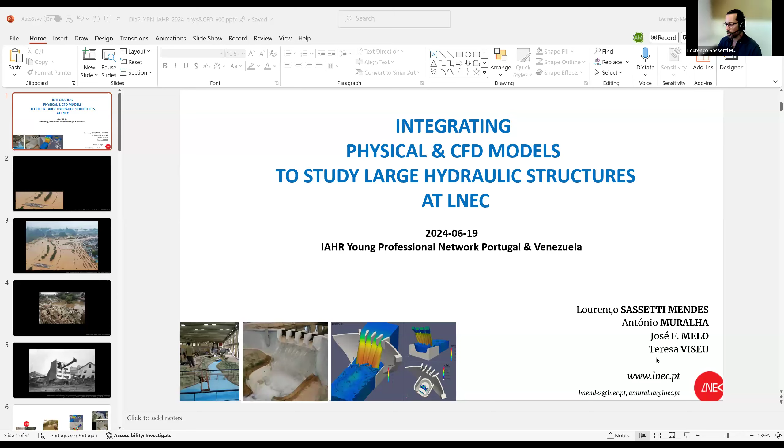So I will start my presentation, as I need to share my screen first. Please just wait a minute. Now, can you see the screen with the PowerPoint presentation? No? Sorry, I had to change, because the one that I want to share is this one. I just hope this bar goes away. I don't know exactly how to do it. Maybe we'll deal with it.

This presentation is titled Integrating Physical and CFD Models to Study Large Hydraulic Structures. It describes the work we have been developing at LNEC, the National Civil Engineering Laboratory of Portugal, located in Lisbon. This work was mainly developed by myself, Lourenço, and Antonio, who is also in this session today, along with Engenheiro Melo and Engenheira Teresa Viseu.

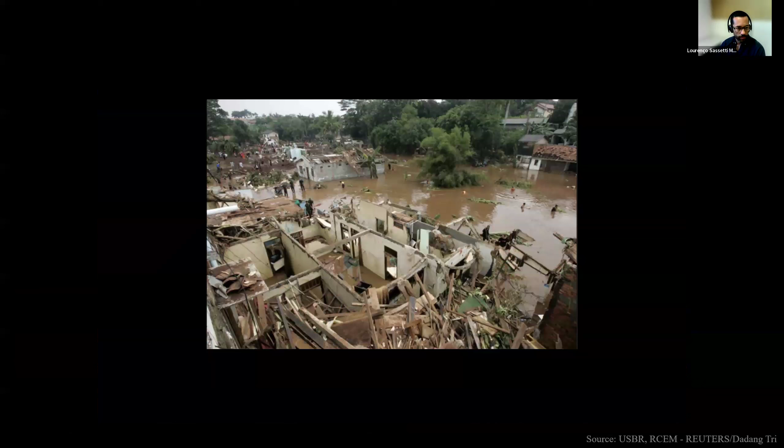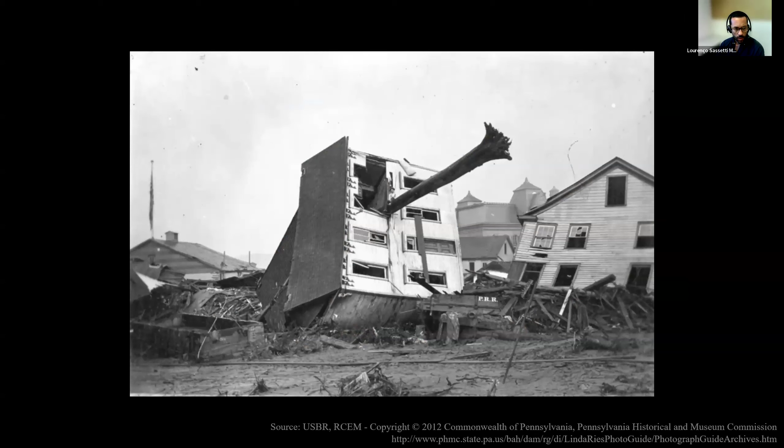So what do we do? At LNEC, our team is called NRE, the Hydraulic Resources and Hydraulic Structures team. Yesterday, Antonio and Silvia also presented our activity, so I'm not going to extend on that much. We have 70 years of experience doing research and consultancy, validating and optimizing large hydraulic structures, mainly spillways, but lots more hydraulic structures, also some urban drainage and other large hydraulic structures.

So in the last 70 years, we have been developing mostly our activity using physical modeling to study these large hydraulic structures. I have to mention that we also do some flood analysis and all other kinds of hydraulic research and hydraulic structure related issues.

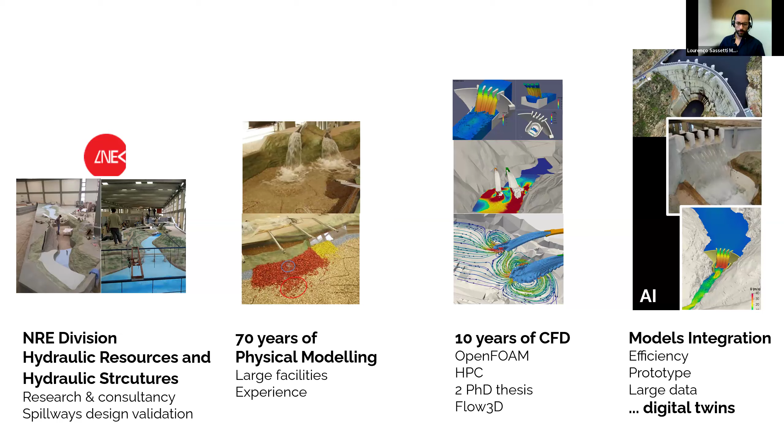In the last 10 years, more or less, we started using CFD, computational fluid dynamics, to help us study our problems, integrating it with the physical modeling. In the future, we hope to integrate it even better with more efficiency, connecting our models, both physical and numerical, to the prototypes, to have more data, to be more accurate, and to have a faster response to the challenges we get from companies, mostly engineering designers who need help to validate and optimize their solutions, but also large research activity, as you will see.

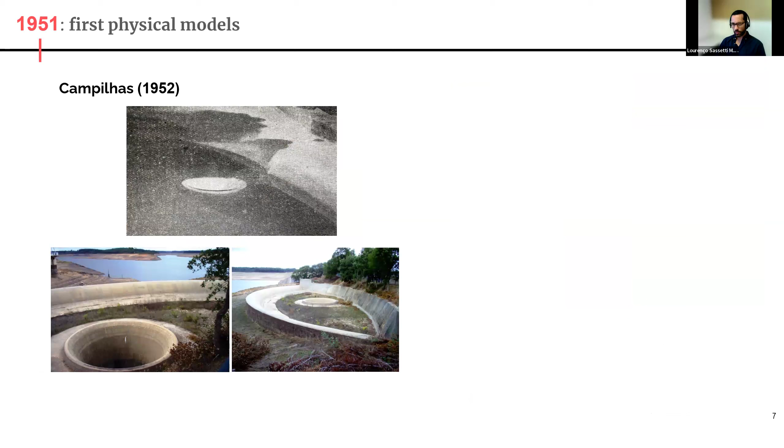In 1951, we started with our physical models. The first one was the dam of Campilhas in Portugal. Our first international model was for Brazil, and that study started in 1952.

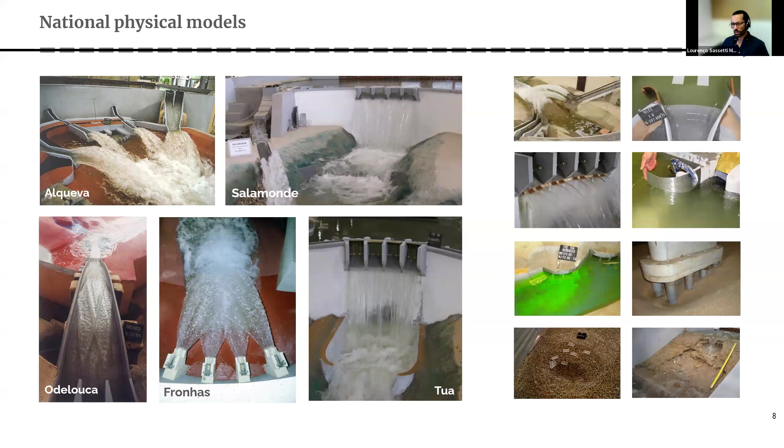We have lots of national physical models. You can see here some examples, mostly spillways, as I said before. We analyzed different elements - here you can see jets, an intake, the shapes of the guidance walls. Here, a traditional way of analyzing it is to change it with a flexible sheet of metal. Also some improvements on this spillway over the concrete dam, where we changed these shapes.

We also study velocities, turbulence and vorticity. This is an outtake of a hydroelectric power plant. We also study erosion in rivers - this is a bridge pile, but erosion can also be caused by jet impingement, and also erosion in earth-filled dams.

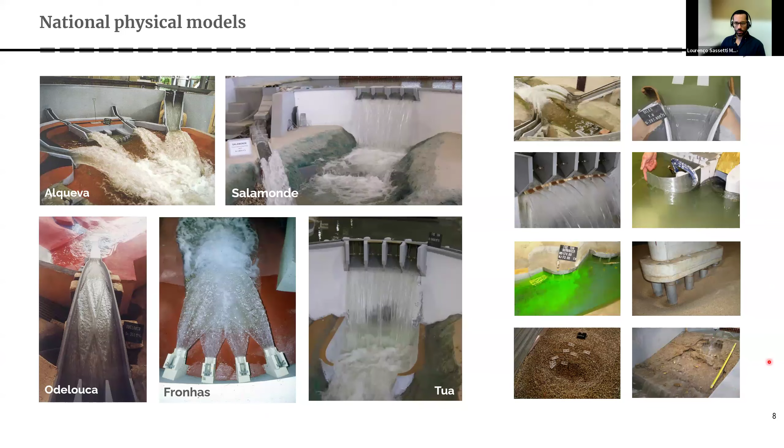We also have lots of international studies developed over the last 70 years. Overall, we've studied more than 150 dams, and most of our studies are regarding dams and spillways - 70% national and 30% international studies.

In your left bottom corner, you can see a typical size of a physical model that we have. It's more or less between 10 to 20 meters long by 5 to 10 meters wide.

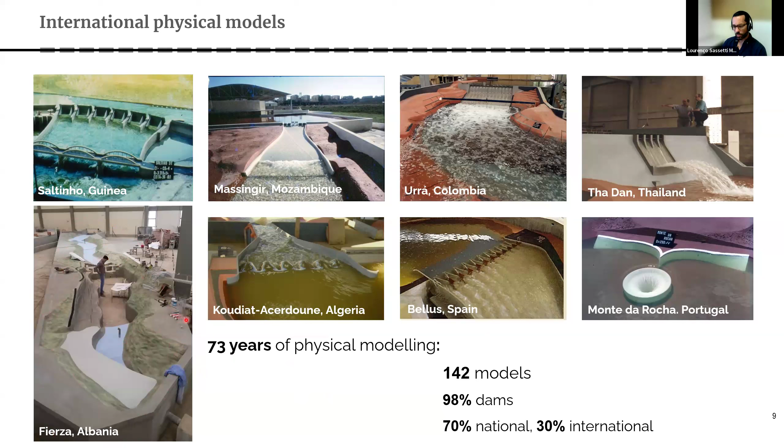We also have some permanent facilities to do research, as you can see, and this was further developed yesterday, so I won't talk about this today, but you can contact us if you're curious about what we've been doing.

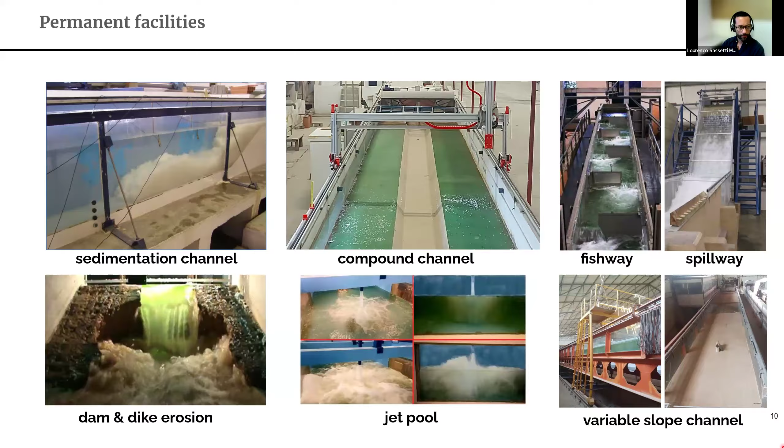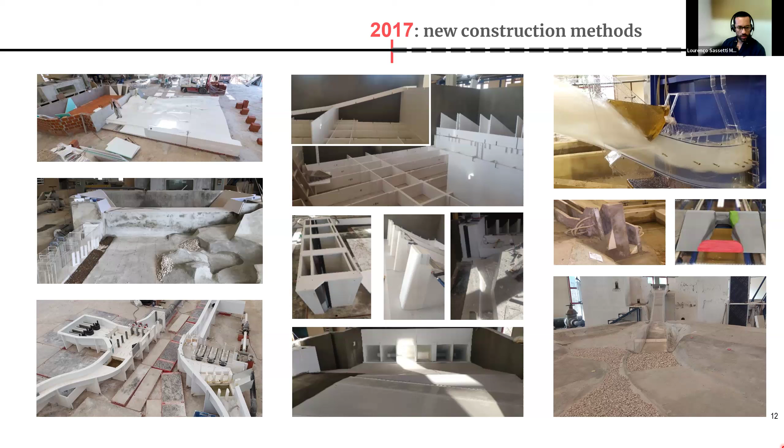Yesterday we also explained that our construction techniques for the physical models are evolving, and we are now using automated processes and new materials, more ecological but also faster to build. This was also developed and presented by Antonio yesterday, so you can talk with us if you're curious about this subject, in case you didn't have the opportunity to see it yesterday.

Now, just to introduce a bit of engineering in this presentation, I will use the example of spillway chutes so you can see how important these studies are. Spillway chutes are a safety structure of dams - they prevent overtopping, which is water passing over the dam, which typically, almost always, will lead to rupture of the dam. So what we do is design validation to prevent those accidents and the consequences I showed you at the beginning of the presentation.

Typically the flow is very complex, with very high velocities and complex phenomena like cavitation, and abrasion or damage of the structure, which is typically concrete. The flow has very high turbulence - it's very complex with roll waves, cross waves, and other non-linear phenomena. One of the most challenging aspects is air entrainment: when velocities are high, the flow starts to mix with air, so we're not just studying water flow, we're studying a mixture, and the phenomena involved are very complex.

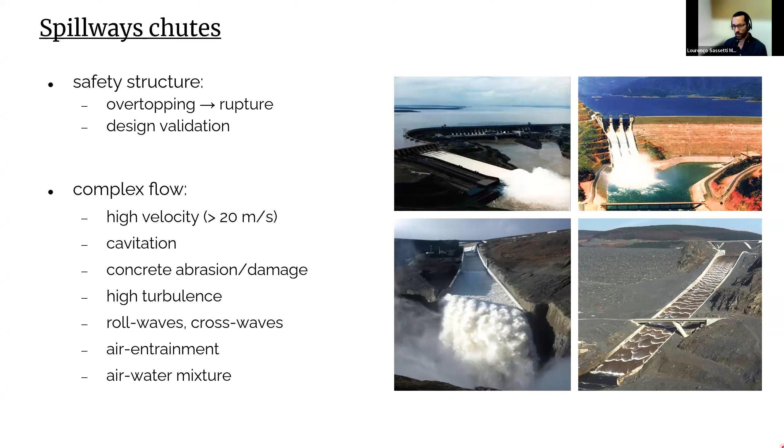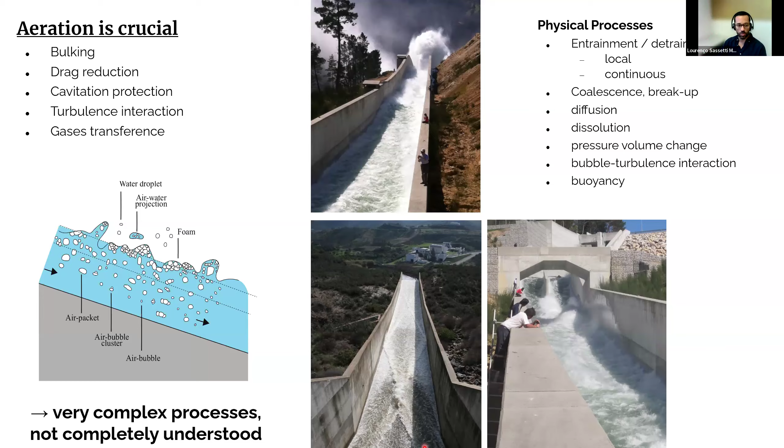But sometimes it also helps, because the presence of air, for instance, reduces cavitation damage, or might reduce it. As an example, you can see in this spillway there are two towers where air enters at the bottom - it's like a step where the air is sucked in, and the air enters the flow to prevent cavitation.

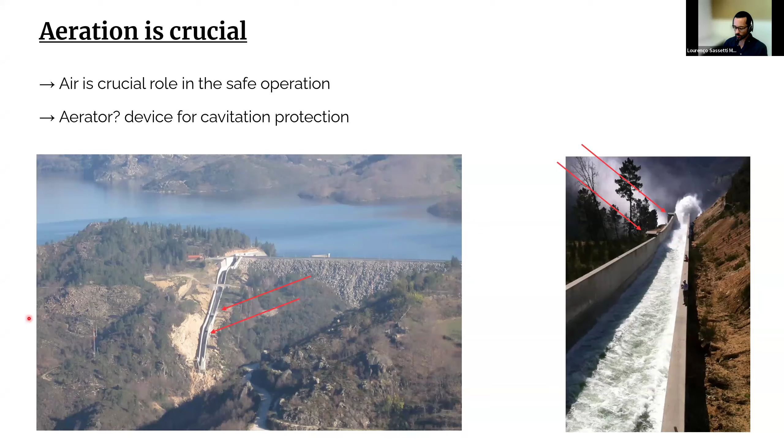So in 2010 at LNEC, we started to think about using numerical modeling to help us in our studies. We called this integrated modeling, where we use both the physical and the numerical to study the problems more accurately.

In a more global way, we can see physical modeling as reliable because it's not calculations, it's not models, it's pure water running in a scaled geometry of the dam. We already have lots of experience regarding the scale effects that this type of model has, but building them is very time consuming. Also, operating takes a lot of time because it requires a lot of instrumentation, sensors, and people working, and it costs quite a lot of money and takes a lot of time.

Some effects are not able to be reproduced at these scales that we are talking about. Even those large models that I showed before, for instance, air is not able to be reproduced accurately.

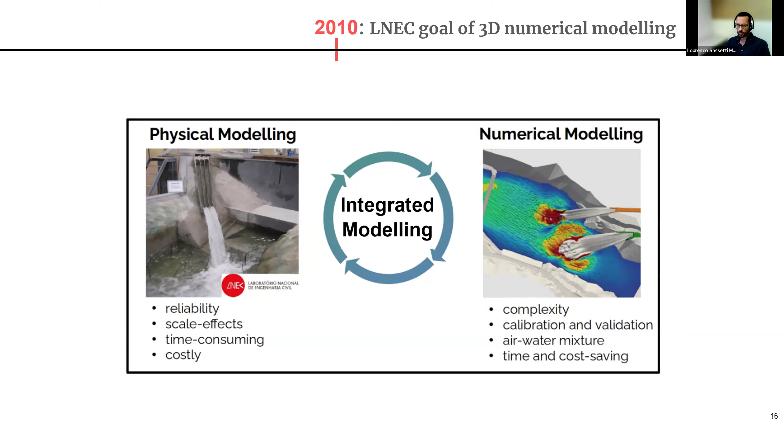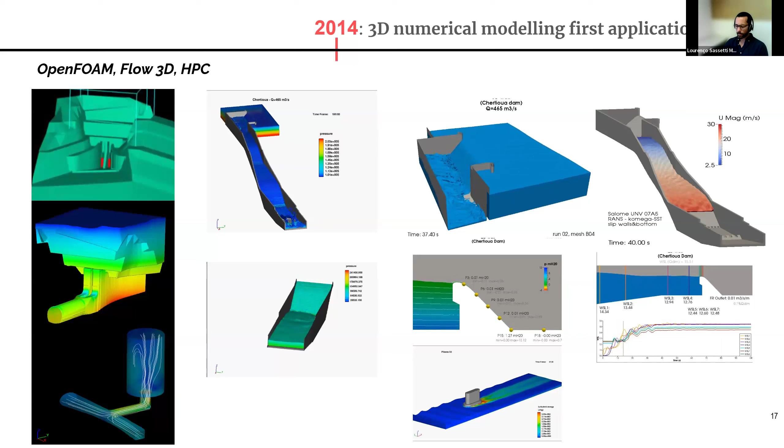To explain this, I will give you some examples of studies we did in the beginning. In 2014, we started to do the first studies in numerical modeling. I will bring you two case studies. The first one is a dam in Albania, the Fierza Dam, and this was done in 2016.

We started with 1D numerical modeling to understand the water levels on the river for different discharges. Then we did CFD modeling tests to understand better how the system works, using just one spillway, then both spillways, because this dam has two spillways, to understand the dynamics better and have an idea of how the physical model would function.

Using this information, we built the physical model. We did some tests and some simple validations of the numerical model, and with the physical modeling we were able to understand the problems that this dam has with the operation of the spillways, mainly damages on the left bank.

You can see this is the solution that we propose to protect this bank using riprap, which are big rocks or blocks. And you can see on this image the effects, the expected damage if there was a very large discharge during a long period of time.

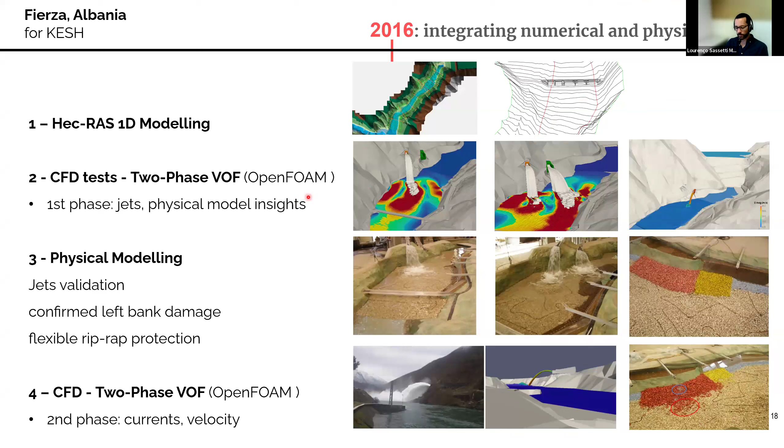I hope this is a video, but it's not playing. Let me just try to... I don't know why. Okay, it doesn't matter. I think if you stop the presentation, you can show the video. Sometimes that happens. Stop sharing? No, stop the presentation. Now I can do it. It's because of the pointer.

Now you can see here the example of physical modeling comparing with the numerical modeling, the streamlines and the velocities that we found. Everything was checked, and this was very useful for us to understand the problem better and to propose better solutions. In this study, we used a two-phase volume of fluid model, quite known in the OpenFOAM software suite, called interFoam, and it was very useful for us.

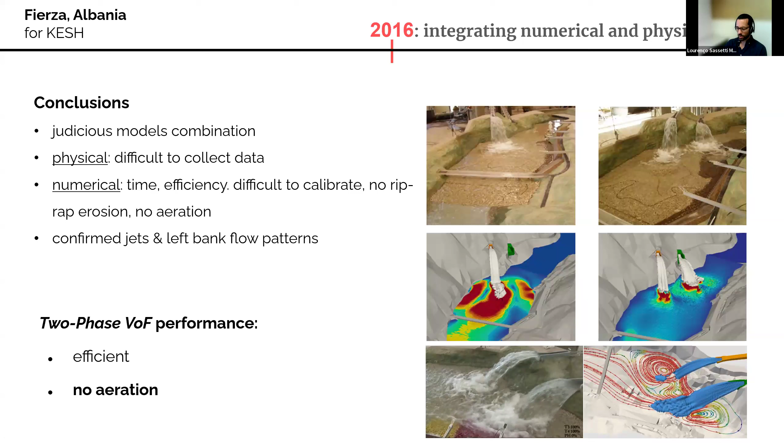The process was very efficient, but this model doesn't model aeration properly. So it's an advantage to use it together with the physical model at the physical model scale, it was okay for us. It was a big advantage compared to when we didn't use it before.

So the next example is a dam in Portugal, the Fratel Dam. You can see this is the dam body, here, a top view, front view. We had to help the developer of the project understand how they can lower the channel, the restitution channel. This is the power plant, sorry. And they also want to implement a fishway so that fish could go up the dam.

They have a device more or less in this wall, and they needed to ensure the fish could go from the river up to this wall. So they had a design that was improved several times using first a numerical model. I'll explain why: the domain to study was very large, 350 meters by 90 meters. It wasn't feasible to have a physical model that could reproduce this whole domain accurately. To do so we would need a physical model 50 meters long or so, a gigantic model, way more expensive than reasonable.

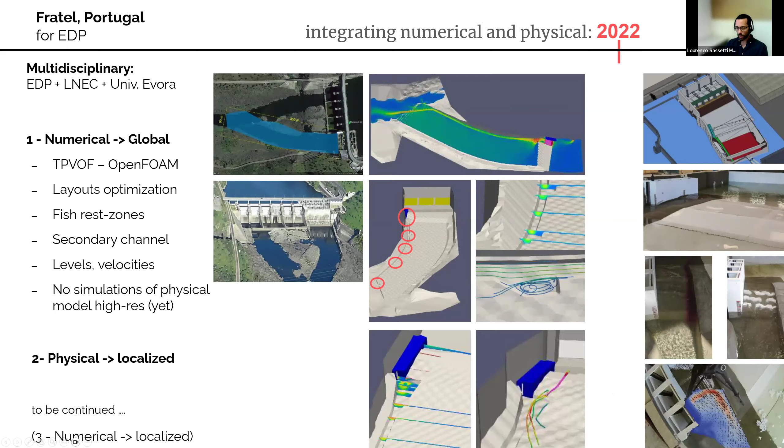The time is running so I won't develop this much more, but we proposed at the IAHR Congress this month a methodology with steps to integrate physical and numerical modeling. First we do numerical modeling to get a global idea of the phenomenon. Then we do physical modeling, starting with the first design, also to get data to calibrate and validate the numerical models. With the numerical models validated and calibrated, we can test many configurations, geometries, or scenarios numerically. This reduces the number of scenarios studied physically, and lets us study far more solutions than typical physical modeling allows given time and cost constraints. In the end, we can also do a high resolution numerical simulation to understand the phenomena even better.

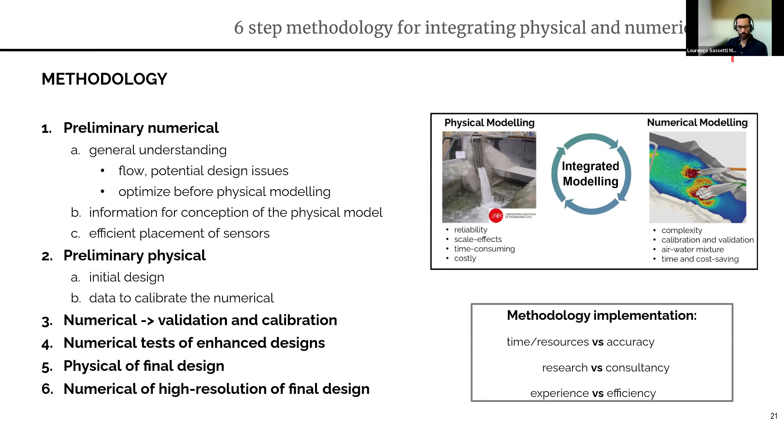Now I'll pass it to Antonio. He will talk about his research activity during his PhD over the last years. Antonio will share his screen. I think it's sharing. Yes, it did everything fine.

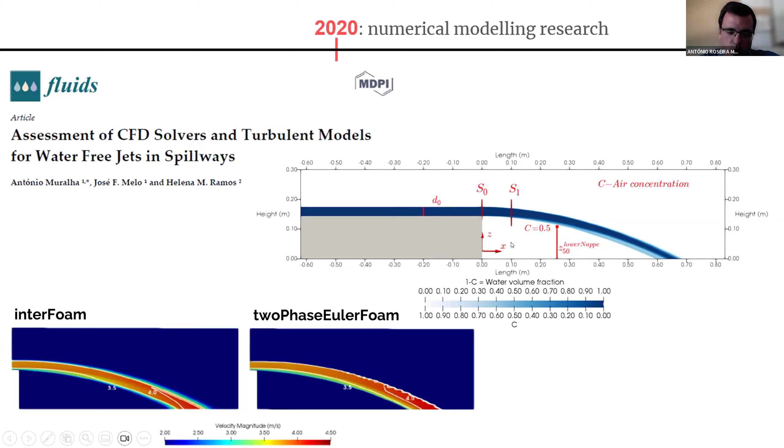We don't perform experimental tests, but we have data from other authors, and I reproduce the exact same flow conditions. It is possible to compare the simulations with those from other authors in order to validate them. A brief explanation of the results follows.

Looking at the velocity profiles along the trajectory of the jet: here is the initial section of the jet in the air, and here is the final section where the referred authors performed measurements. In red is the Volume of Fluid solver interFoam, and in green the two-phase Euler solver. In the core of the jet, the velocities are more or less the same, but in the lower and upper nappe of the jet, in the more dispersed zone, the two solvers start to diverge a bit, with the two-phase Euler foam matching the experimental results better than the VOF solver.

This is an area of high air-water mixture, and due to that, the VOF solver can have some problems regarding mesh size and things like that. We do not have time to discuss it further now.

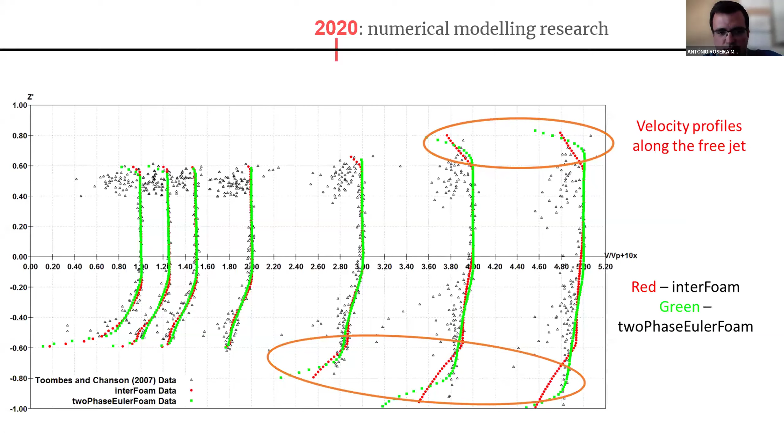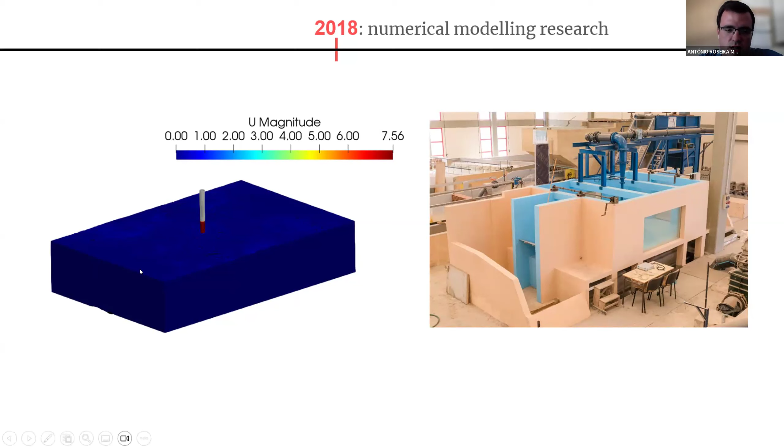We obtain numerical results for the same type of structure with the same dimensions as shown in the left figure, and we also compare the two solvers. We define this domain with exactly the same dimensions and characteristics as the experimental facility.

A good practice is to have results independent of mesh resolution, and the two-phase Euler solver performs better compared with the experimental data we obtained in the experimental facility, reaching mesh independency.

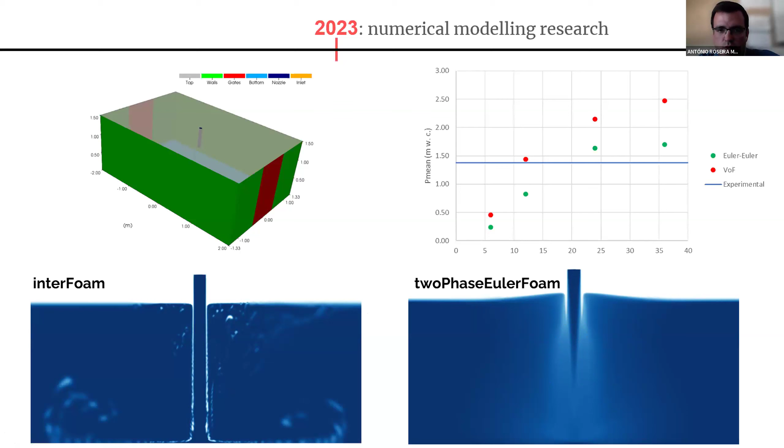On the other hand, with the two-phase Euler foam, the air pockets are less clearly defined because of the type of solver, but we see air mixture throughout this area, and the core of the jet dissipates as it travels inside the plunging pool, as was expected and described in the literature.

Now back to Lourenço. Okay, so the time is running out, so I have to be faster.

I didn't explain, but I want to say now, that our research activity has mainly been on understanding better the numerical tools, in this case the solvers. So we studied the volume of fluid, the two-phase volume of fluid, and also the complete Euler solver. During my thesis, I also implemented the subgrid bubble model in OpenFOAM so we can use it together with the volume of fluid solver. We had good results in a spillway chute, but not so good in the impinging jet because it's way more complex. But we can talk about this another day.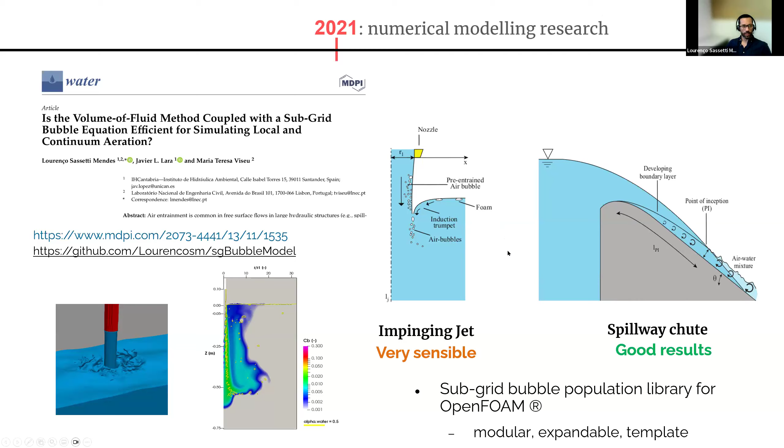I also did some comparison of performance in a spillway aerator, where I studied different turbulence models, both the models mentioned before, and different resolutions, so we can see what Antonio also said before: when there's aeration, the volume of fluid is always misleading unless we have a mesh resolution down to the bubble size scale, which is impossible in engineering studies.

So the complete two-phase Euler has shown interesting and very important performance, though it's a bit more difficult, more demanding, and more time consuming than the volume of fluid.

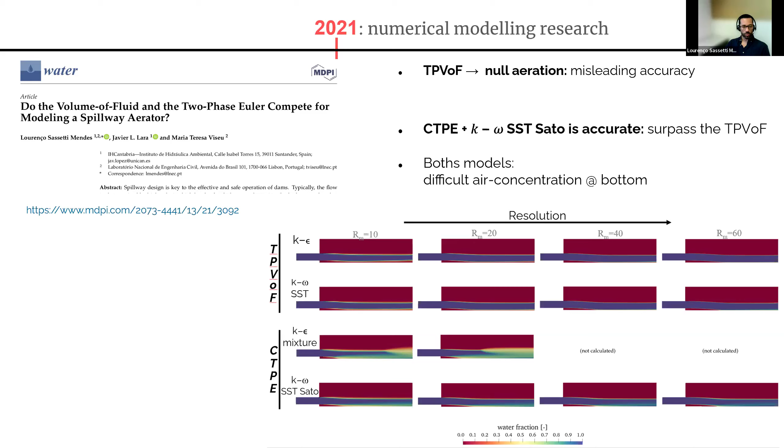Okay, to sum up our presentation in terms of research, we have now analyzed and defined which model to use in each type of region of a spillway, though it could be any hydraulic structure. We would use the volume of fluid in the intake or restitution where there is no significant air entrainment, or even at the beginning of a spillway. During a spillway with low air concentrations, we can use the volume of fluid together with a subgrid bubble model. But when there are high air concentrations, typically in steep chutes, aerators, or dissipation basins, we have to use a complete two-phase Euler solver or model.

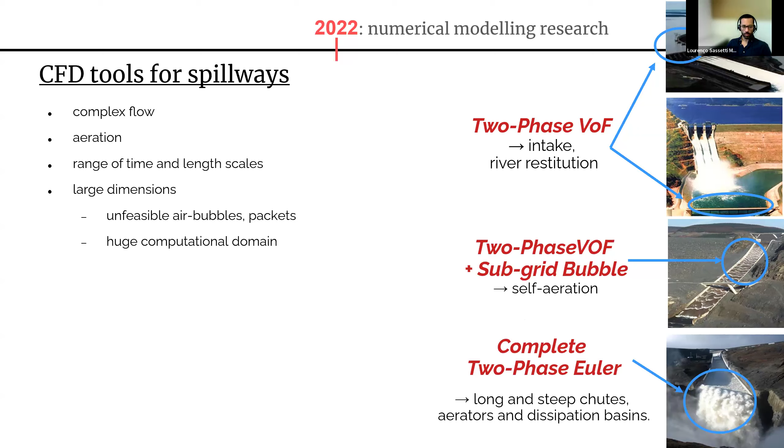Okay, this is our last slide. So in the future, what we want to do, we want to be more efficient. We need more experience. We have done some studies integrating both these tools, as you can see here, one study in Portugal.

But we need to gain more experience to understand better how models work. So far, there isn't a numerical model that can study erosion properly, and this is also being developed in the thesis of Antonio, especially dedicated to fractured rock beds. And we want to apply the two-phase solver to large hydraulic structures, which we haven't done yet.

We also would like to develop some research in CFD classification, like having grades, A plus, B, C, D, to better classify the type of numerical modeling, if it's a high quality, average quality, or low quality. But all these grades or ratings are important because sometimes we have to be fast, sometimes we have a lot of time, as in research. So these classifications are important for us.

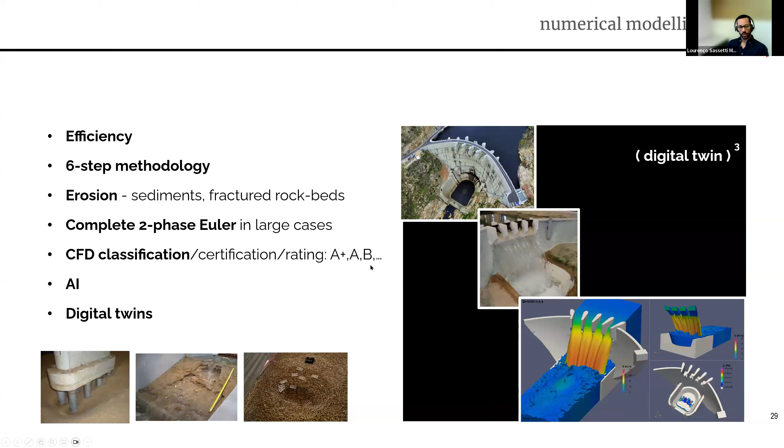Integrating artificial intelligence is also important, and we would also like to implement some digital twin technologies where we can integrate the prototype, the physical model, and the numerical model in a single digital twin.

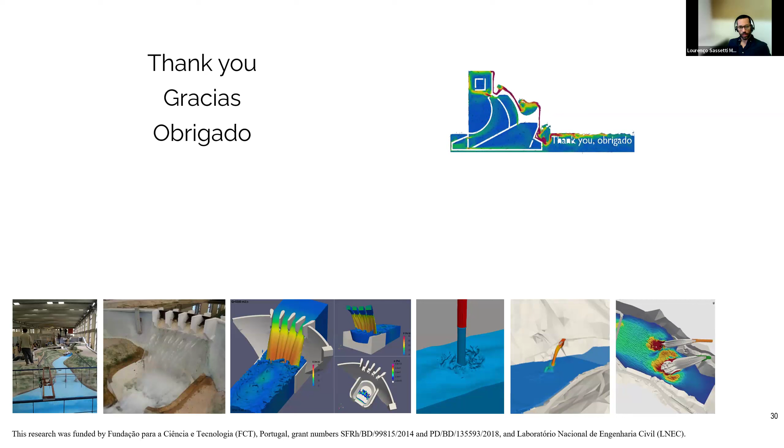This is just a small, let's say didactic simulation that I did for the IAHR Congress that we are in at LNEC last week. It was the European Congress, and as you can see, CFD can also be used to produce colorful images that can help us communicate better with engineers, and also with politicians or other stakeholders involved in the projects.

Gracias. Obrigado. I'm sorry for the extra time.

Thank you so much. It's the University of Iowa, Institute of Hydraulic Research, CVG, Corporación Venezolana de Guayana en Venezuela, ¿no? I will share the presentation. A moment, please. Okay, can you see it? Yes. Perfect. Okay. Okay, you see it? Yeah, now. Okay. Good. Okay, let's start.

Good afternoon, thanks for coming to the webinar, thanks to the Young Professional Network, YPN, of the International Association of Hydraulic Research, IAHR. I will give you a brief contribution on hydraulic modeling to the dam safety program of the Caroní River hydropower system between 2000 and 2010, from the hydraulic point of view. The purpose of the presentation is how experience was applied systematically in a dam safety program using hydraulic modeling in a complex system such as the Caroní River.

The content: you will see the Caroní River Basin, development of the hydropower, background about EDELCA and some achievements, then the hydraulic department, why we implemented a dam safety program, how we did it, hydraulic tools used for that, past studies before the 2000s, the dam safety program achievements, some remarks, and references.

The Caroní River Basin is in South America, also in Venezuela. The basin has an area of 93,000 square kilometers, almost 960 kilometers in length. The average discharge is about 5,000 cubic meters per second. The total drop is 912 meters, with a high discharge rate of 53 liters per second per square kilometer.

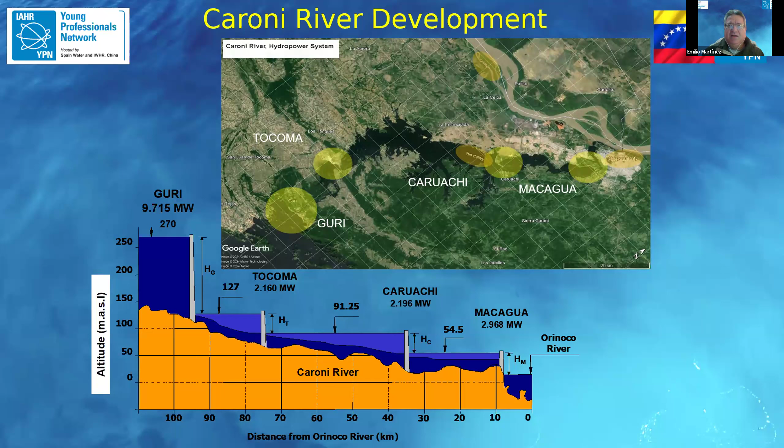You will see here the maximum discharge for the spillway at Guri, 28,800 cubic meters per second, with a maximum water level of 270.6 meters above sea level. Tocoma has the same spillway maximum discharge from Guri, with maximum water level 126.5 meters. Caruachi is 91.25 meters, with maximum discharge for the spillway of 30,000 cubic meters per second. Macagua has the same discharge, with normal water operation at 54.5 meters above sea level.

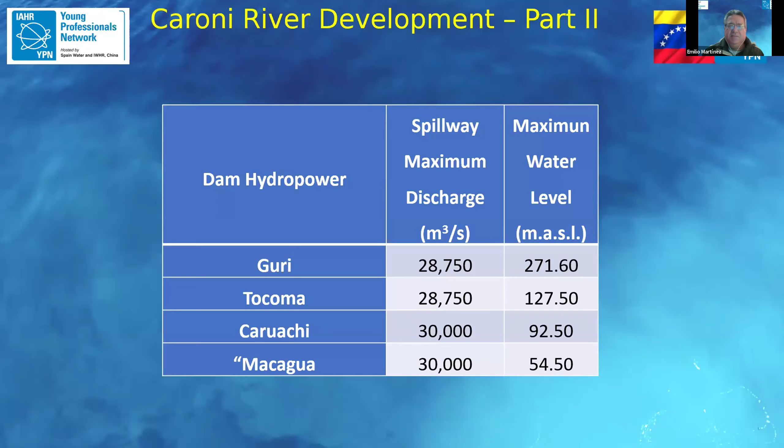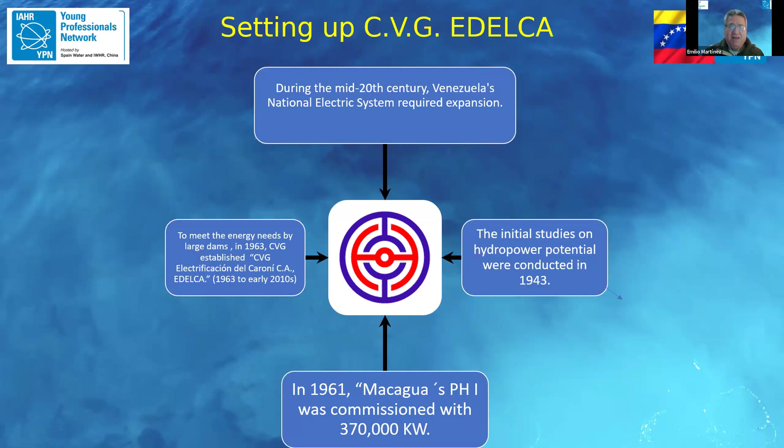Because Venezuela needed to continue to supply the energy demand, EDELCA was born in 1963. Some important achievements that EDELCA did include the construction of Guri Phase 1. The company acquired the know-how, created a strong organization, and introduced itself into the electricity market as main generator and energy transmitter. Water resource development for hydropower was important, and each project needed to pass all feasibility studies. The company established its own engineering units to get high standards for construction, and the hydraulic department began operation in 1977.

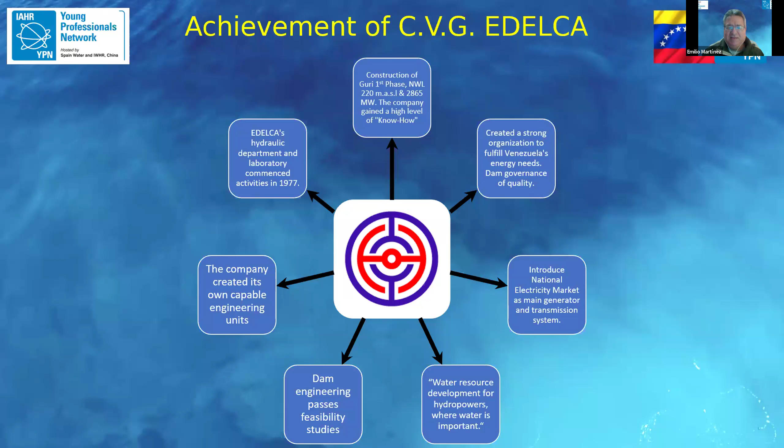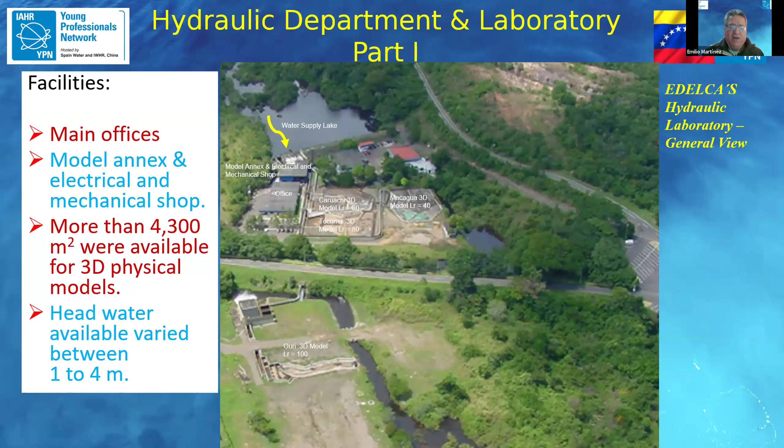You will see now the facilities of this hydraulic laboratory, located in Macagua, in the surrounding area of Guayana City. The area available for 3D physical models is almost 4,300 square meters, with variable head between 1 to 4 meters. It's a huge discharge, almost 5 cubic meters per second, available driven by gravity, and the total area for the hydraulic department was almost 28,000 square meters.

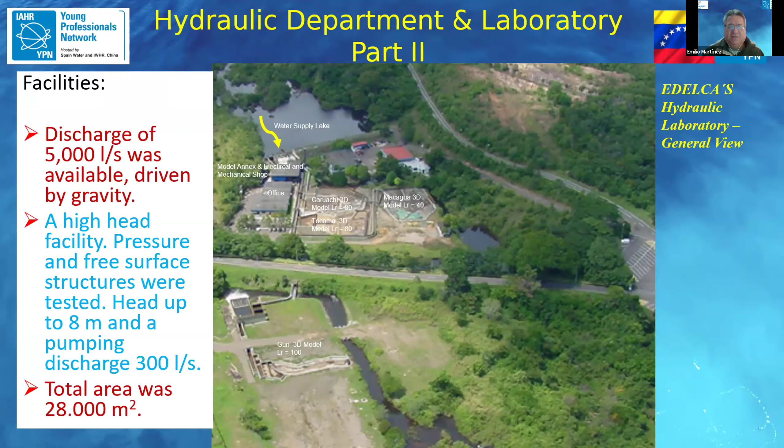Here you will see the organization of the lab. The head of the hydraulic department was a civil hydraulic engineer, with an administrative assistant, secretary, international consultants, Venezuelan consultants, 6 civil hydraulic engineer staff, interns from Venezuela and abroad, instrumentation and data acquisition, engineering support and documentation rooms, and a survey team.

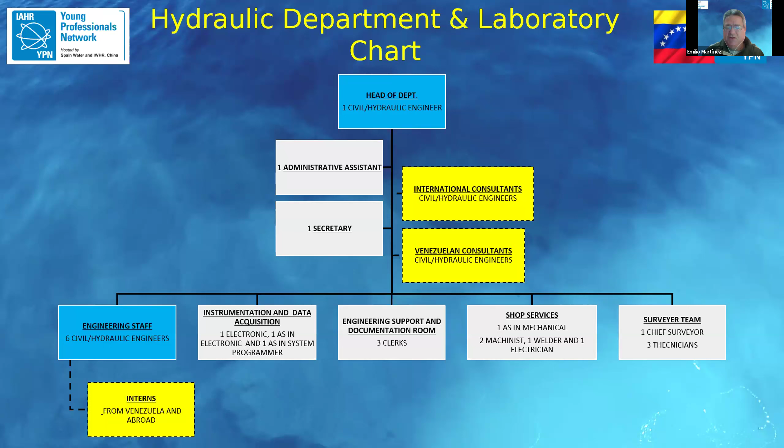Why did EDELCA implement a dam safety program? In 2002, they began the last project. You will see in this table how projects were done in parallel form, according to the master plan. Therefore, the company needed to continue operation and maintenance rules, maintaining the hydraulic system, ongoing globally advanced safety issues, and concern about climate change.

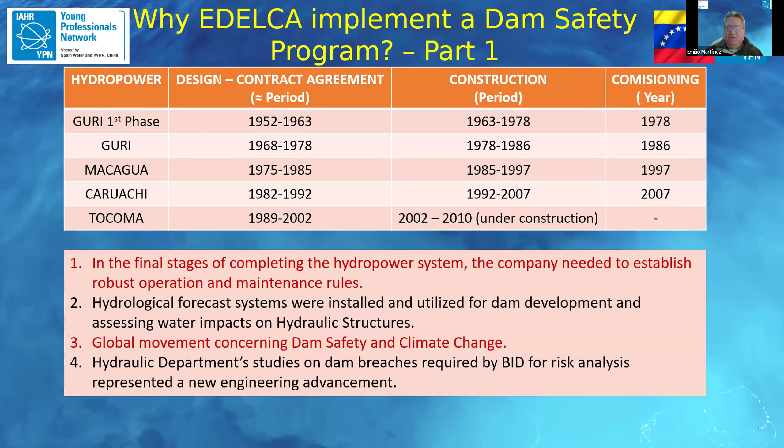There are also some dam breach studies required by the Inter-American Bank. There are many instruments for dam monitoring and surveillance installed, with capable engineering units experienced enough to continue establishing operation and maintenance rules, especially in civil works. EDELCA needed to continue with dam quality governance during final operation of the old system.

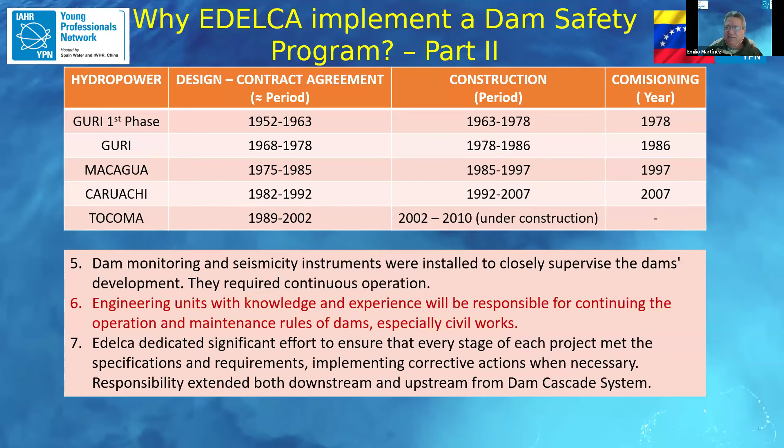How did EDELCA do it? Well, in 2000, many engineering units implemented programs. The IAHR symposium held in Guayana City in 2006 allowed relation with consultants to initiate the program, systematically starting relations with the Universidad Politécnica de Valencia, España. You will see the program continued until 2010.

At that time, with the contract assignment finished, you will see here all the activities that we did: basic activity for risk management, development of risk management, monitoring dam safety operation, communication, monitoring, surveillance, preventive maintenance, corrective maintenance. So we have to continue with these kinds of important programs.

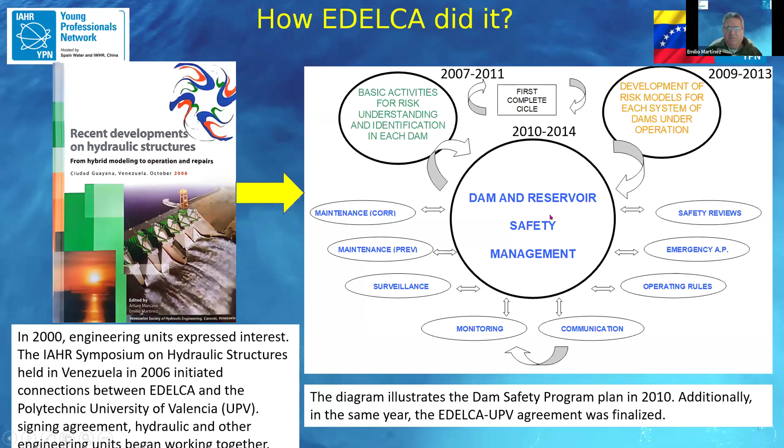One of the tools used to evaluate hydraulic structure response to a hydraulic event was a 1D numerical model, as you see in the scheme, from Guri to Macagua River. The model was set over 100 kilometers of river length, with water profile calibrated and validated.

There were 49 gauge stations, 179 river cross sections, a survey map at scale 1 to 10,000 including both river banks, and Manning's coefficients came from calibration and validation. The programs that we used were FEQ, HEC-RAS, and DAMBRK.

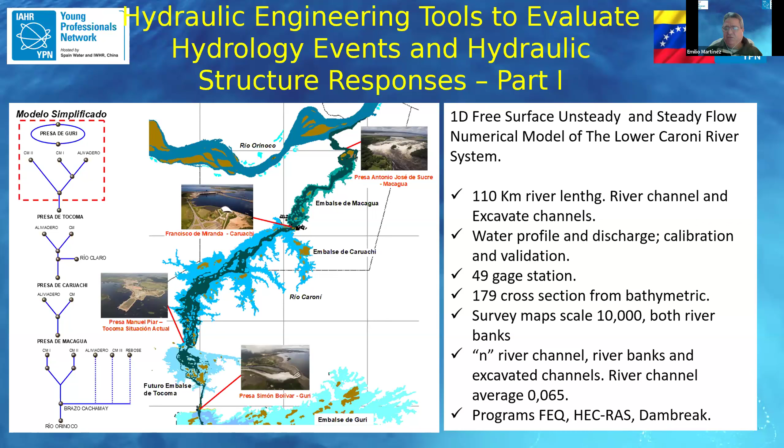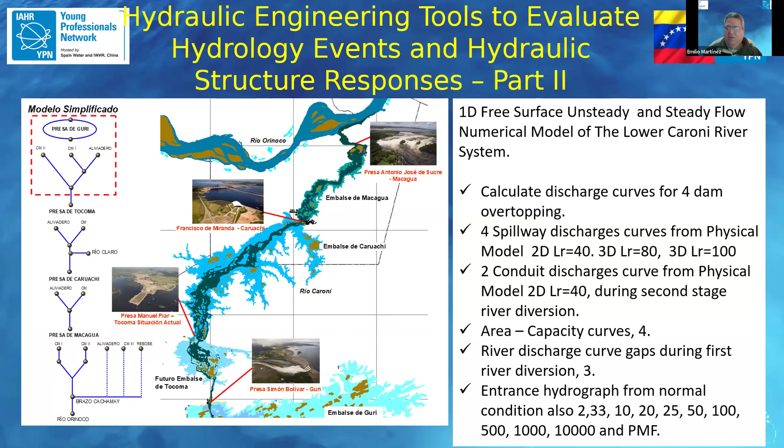Also, we had to include overtopping discharge for each dam, spillway discharge curves, area capacity curves, hydrographs from normal river flow, and stream flow from 2.33 years up to PMF.

Also, we use the available information from hydraulic physical models. Maximum spillway discharge from the PMF entrance to Guri Dam is 48,000 cubic meters per second. We use all the information for energy dissipation tests, hydraulic structural behavior, and spillway chute erosion.

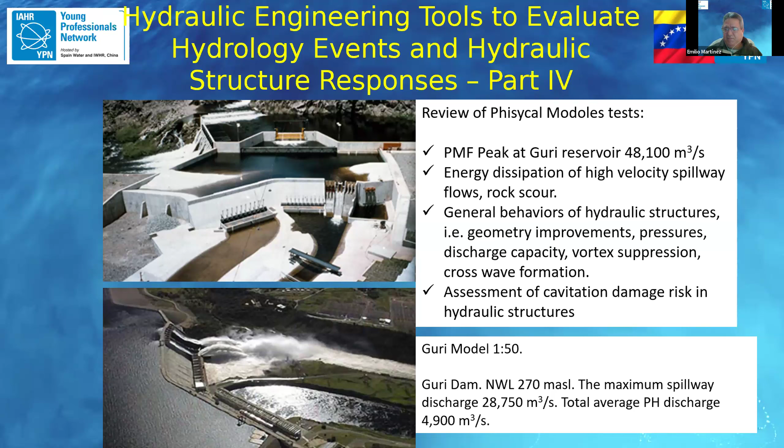When we review studies on this problem, we have a study from the Caruachi report. We were thinking about dam safety and the consequences of a breach of the Caruachi project. The result regarding the cascade system and its impact on Guayana City was shared with the Guayana City Council in 2007. You will see the inundation map on the right side.

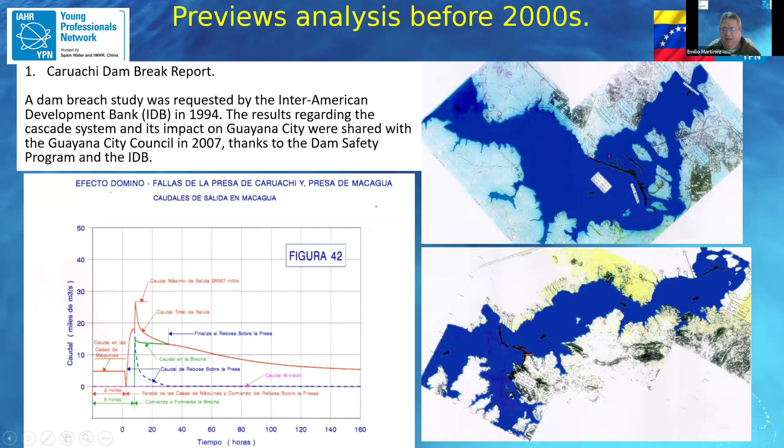Also, this previous analysis before 2000 was focused on avoiding any possibility of overtopping in Tocoma Dam. You will see that they are close, as shown in the slide. They are so close, almost 18 kilometers apart.

The normal water level is 127 meters above sea level. The reservoir volume up to 127.50 meters above sea level is for the PMF. The two spillways should be open at the same time.

As you see in the plot on the right side, the discharge in a cross section close to the dam increases from 5,000 cubic meters per second to 15,000 cubic meters per second, and the Tocoma water reservoir level only dropped 10 centimeters.

We are confident and very sure that this dam should open its gates at the same time in order to avoid overtopping, even though the dam has enough freeboard.

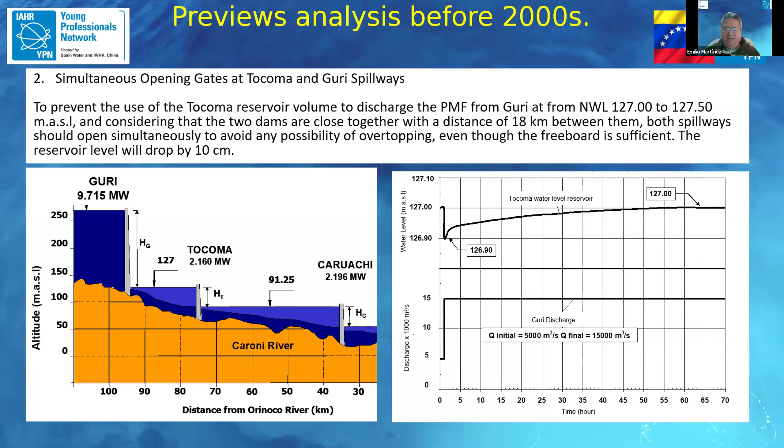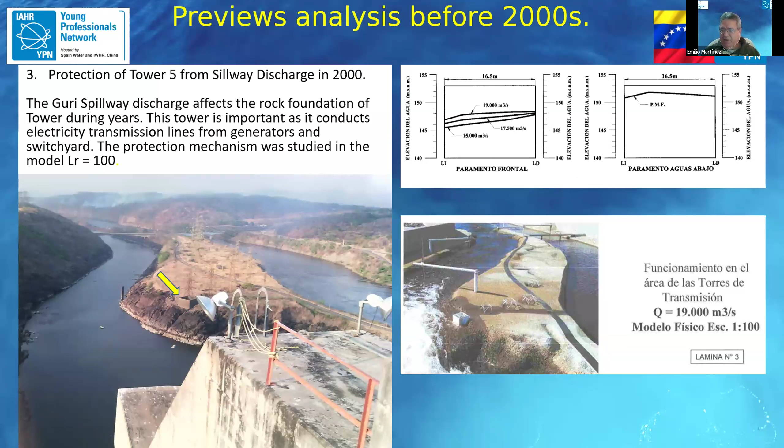Here is the test in the hydraulic model. This analysis shows us that the dam structure could be aging during operation, and it will need maintenance.

There are many things that we did in the program between 2000 and 2010, and I will highlight some of them. For example, the establishment of the Dam Safety Committee, the Tocoma Dam breach study requested by the Inter-American Development Bank, a new emergency action plan for Tocoma Dam, and also we practiced, doing drills. The program also implemented a training period.

We also did risk analysis for Macagua Dam, and a new inundation map for the whole river, especially for the last 10 kilometers of the Caroni River close to Guayana City. Here are some examples of the hazard calculation.

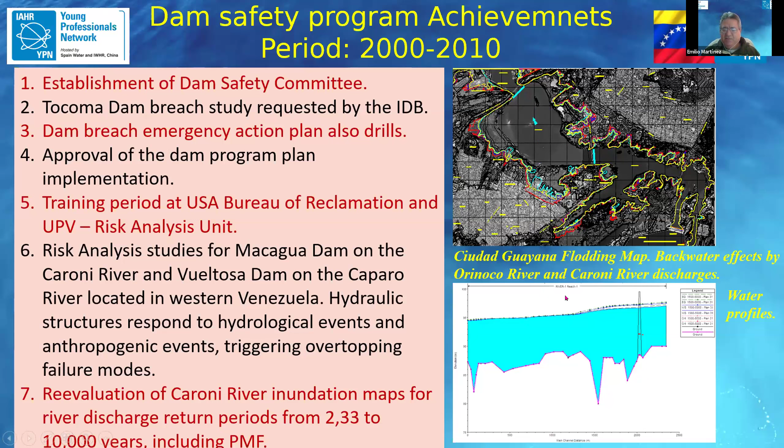Also in that period we created the manual for spillway operation rules for the cascade system. We set an area of the reservoir and mandatory sums in the reservoir to release water in order to protect the dams.

Also, during the Caruachi Dam reservoir filling, we implemented an emergency action plan.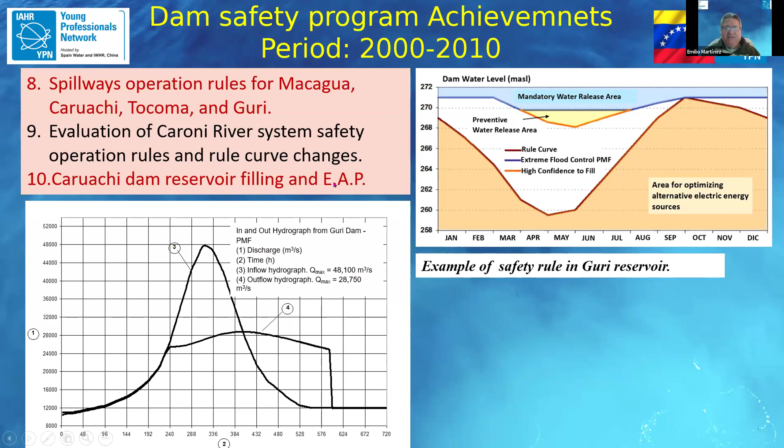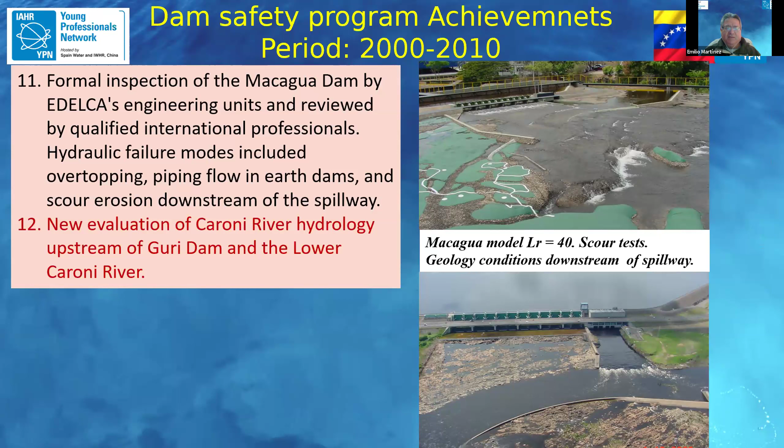Also in that period, we did a formal inspection of Macagua Dam, done by EDELCA engineers and reviewed by international professionals. The hydraulic failure modes that we studied were overtopping, spillway scour erosion, pipe flow, and new hydraulic evaluation. We also did this for the Caroni River basin.

Also, we did a formal inspection for the Guri Dam by EDELCA engineers. The failure modes that we studied were overtopping, spillway scour erosion, spillway cavitation, and shear force erosion.

You will see an example of a geology and hydraulics engineer in the photo evaluating spillway scour erosion. We were looking at rock joint set orientation, and also used Annandale methods to determine the rock resistance and the power of the jet stream from the Guri spillway, along with all the design criteria in Guri for energy dissipation.

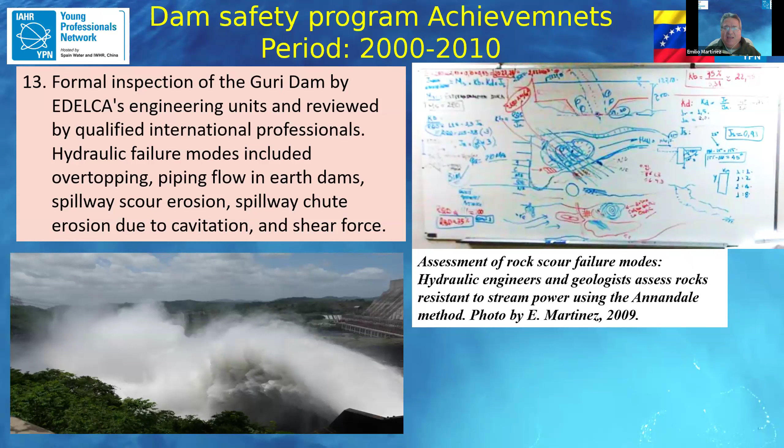Finally, spillway erosion and aeration. We checked that the aeration system fulfilled all the design criteria for that time, but because of the shear force from high water velocity in the spillway, almost more than 20 meters per second, and some reaction between the water quality and the surface concrete, these kinds of problems occurred. You see this hole here in chute one of the spillway, because the water degraded the surface concrete material.

And then we repaired the spillway with a better concrete mix and good bond strength between the new and old concrete surfaces. Thanks to the concrete laboratory, monitoring surveillance team, structural team, hydraulic units, and other important engineering units and former EDELCA professionals.

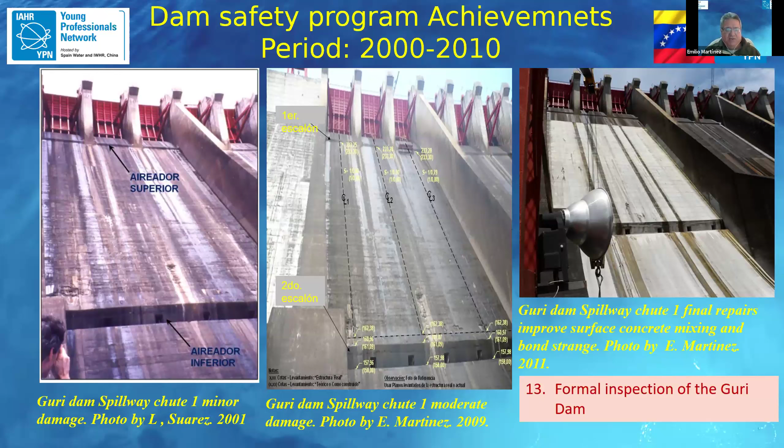Combine field data, calibration, validation, alternative assets, numerical model, physical model, and data behavior from real hydraulic structures. When all of this information is available, it ensures reliable results.

After a dam begins operation, hydraulic engineers along with other important engineering areas, including hydrologists, need to be involved in the operation and maintenance of the dam.

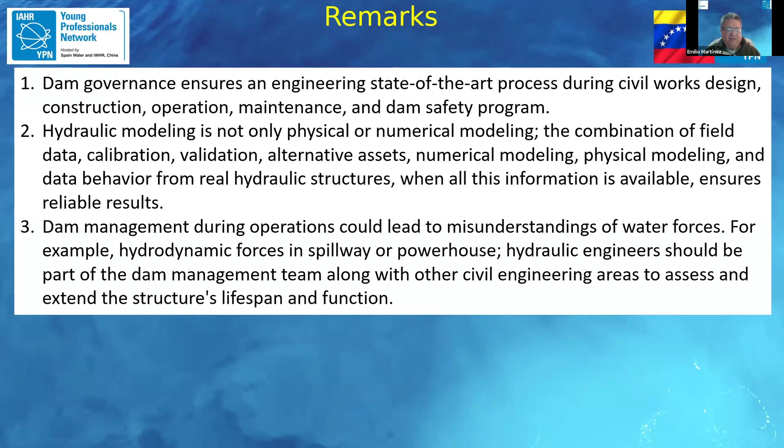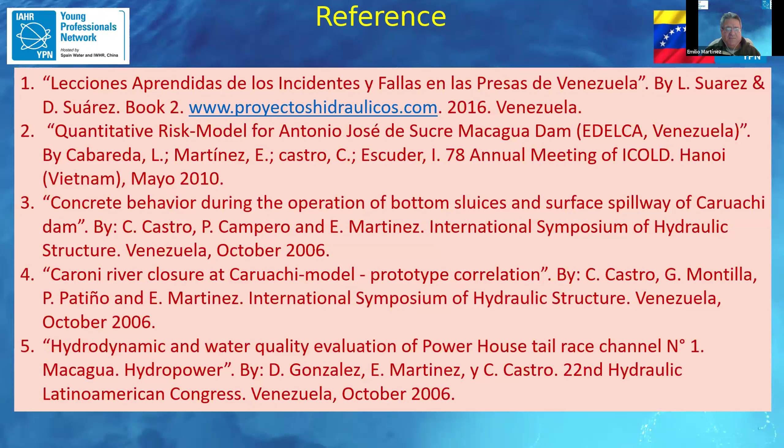Here are some references you can use to investigate more about this step. Much information is classified by the actual company, and you will see this reference. Thank you so much for your attention, all of you.

Excellent. Thank you very much, Emilio, for your great presentation. Very good images to get an idea of what you were explaining about.